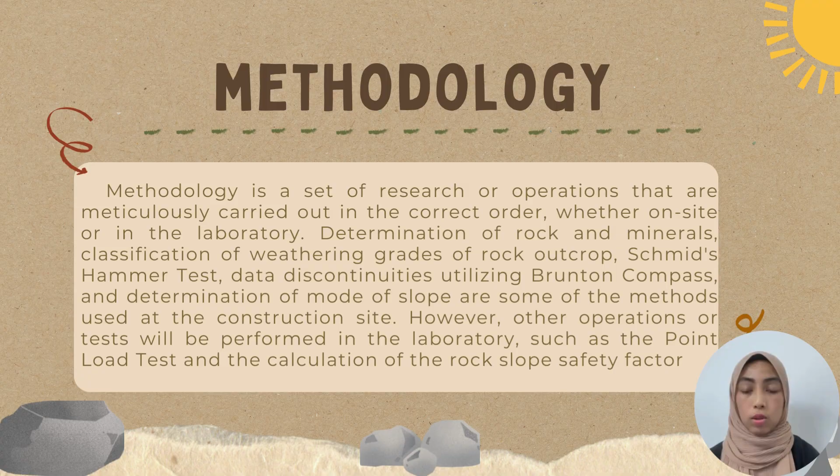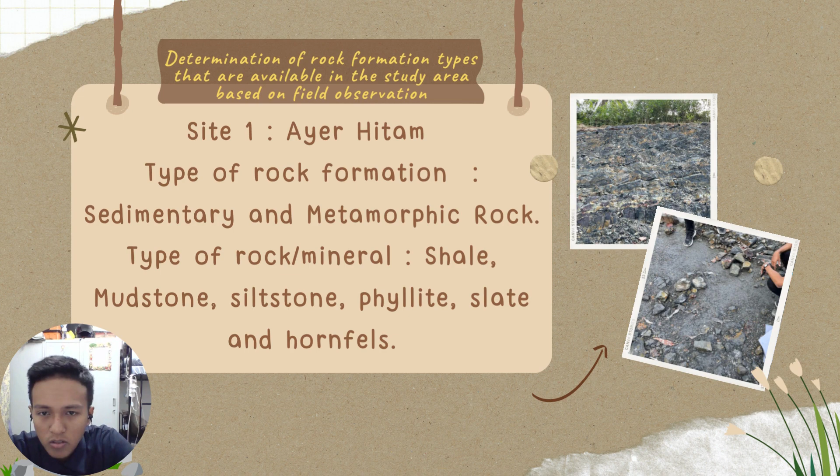First is to determine the rock formation type that are available in the study area based on field observation. At Ayer Hitam, the type of formation is sedimentary and metamorphic rock, and the type of rock or mineral is shale, mudstone, siltstone, phyllite, slate, and hornfels.

Identification and classification of weathering grade of the outcrop. At Ayer Hitam, there are 4 grades: 3, 4, 5, and 6, which is moderately weathered, highly weathered, completely weathered, and residual soil.

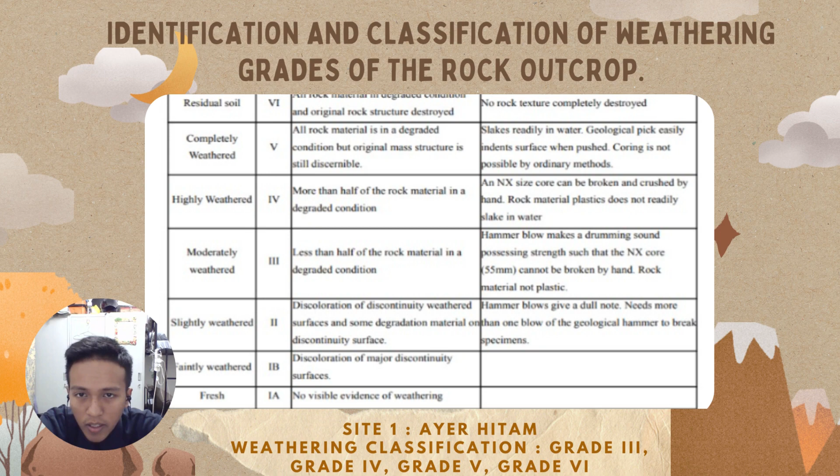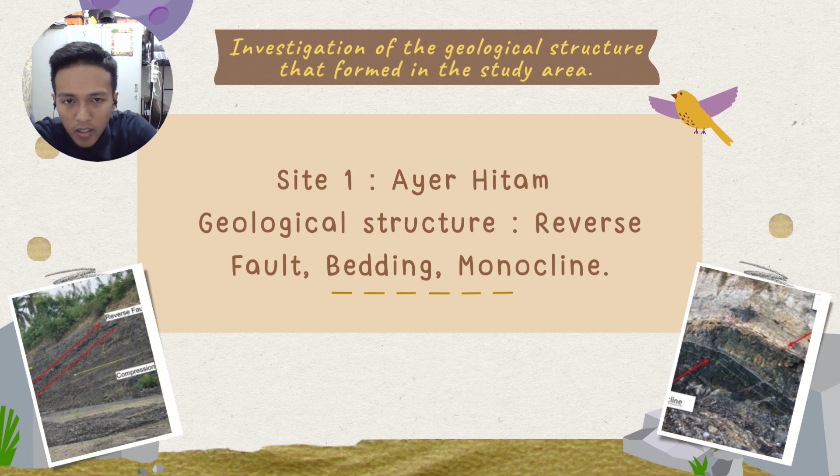Investigation of the geological structure that formed in the study area. There are 3 geological structures: reverse fault, bedding, and monocline. And there are 3 types of index testing: Schmidt hammer, point load, and slake durability.

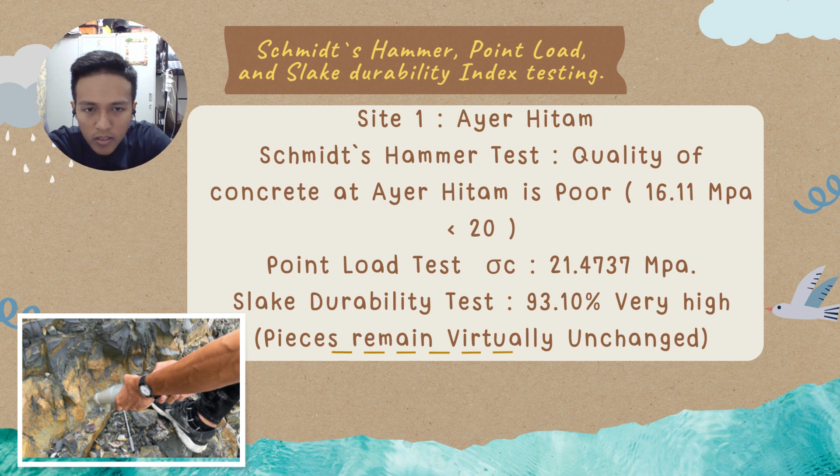Schmidt hammer test quality of concrete at Ayer Hitam is poor, which is 16.11 MPa, less than 20. For point load test, 21.4737 MPa, and slake durability test 93.10%, very high. Pieces remain virtually unchanged.

Determination of rock mass quality using 2 methods: rock mass rating (RMR) and geological strength index (GSI) for slope. For RMR, we got a rating of 42, which is grade 4, fair rock. And for geological strength index, 25% is blocky and disturbed.

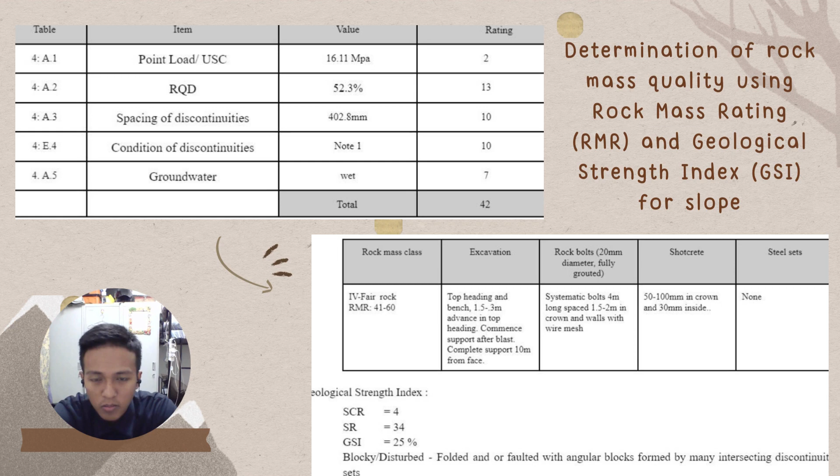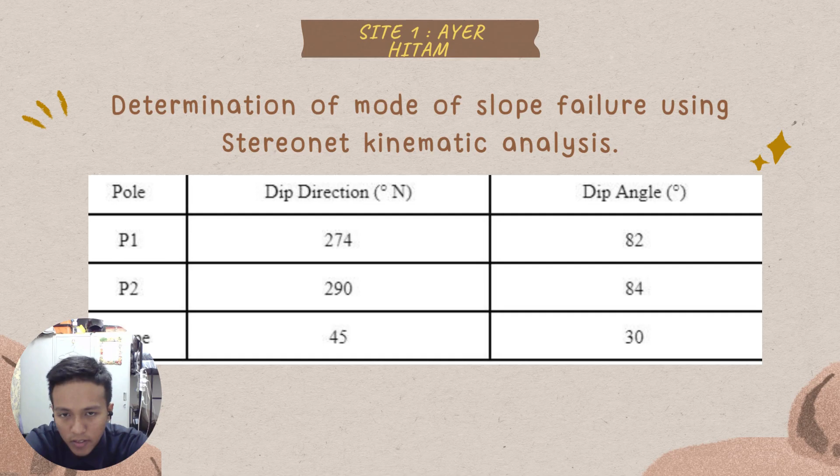Determination of mode of slope failure using stereonet kinematic analysis. For pole 1, dip direction is 274 degrees and dip angle is 82 degrees. For pole 2, 290 degrees dip direction and 84 degrees dip angle. And the slope at Ayer Hitam is 45 degrees dip direction and 30 degrees dip angle.

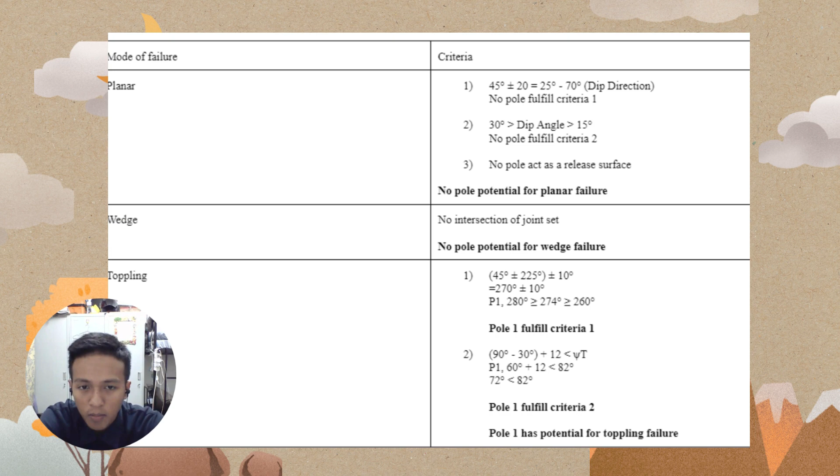Criteria for slope failure at site 1: for planar failure, no pole has potential. For wedge failure, no pole has potential. And for toppling failure, pole 1 has potential.

The factor of safety for the selected rock outcrop slope for the site study. For Ayer Hitam, pole 1 has potential for toppling failure. That's all from me. Thank you.

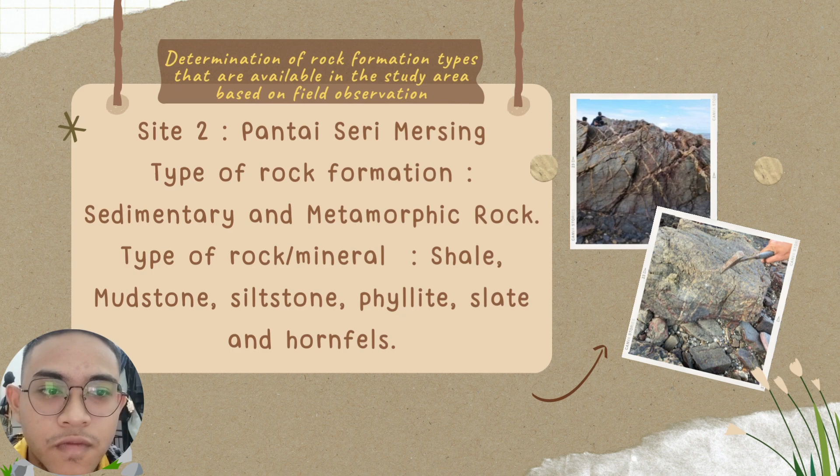Based on our field observation for the determination of rock formation types available in the study area at site 2, the type of rock formation we observed is sedimentary and metamorphic rock, and the type of rock or mineral is shale, mudstone, siltstone, phyllite, slate, and hornfels.

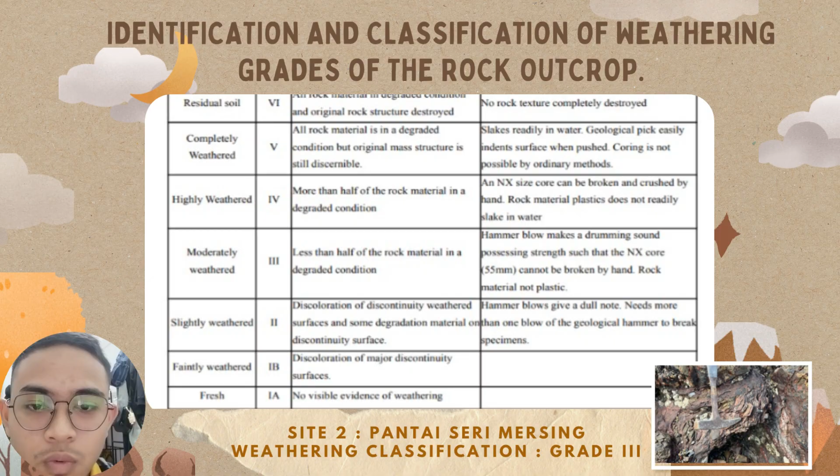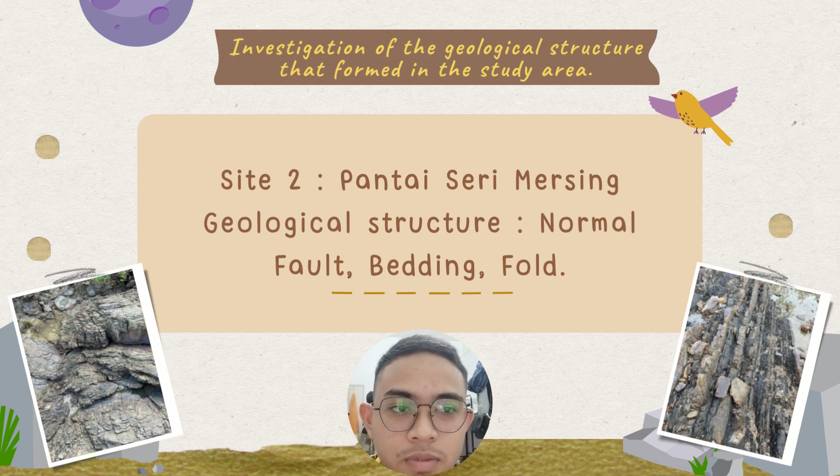For the next part, we study the geological structures that are formed in Pantai Seri Mersing. The geological structures we got are 3 types, which are normal fault, bedding and fold.

Okay, for the Schmidt hammer test that we got in Pantai Seri Mersing, the data obtained and the results for the Schmidt rebound hammer graph based on MPA, we calculated the average. So we got 40.22 MPA, which is more than 40.

And then for the point load test, from the point load data test, we got average point load test, which is 2.9713 MPA, and we calculated the uniaxial compressive strength UCS at rock, which is we got 59.4253 MPA.

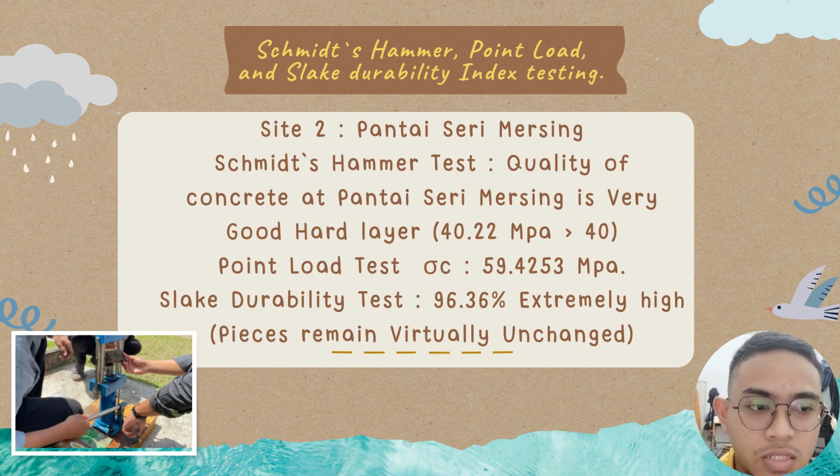Okay, for the last test for this site is we observe the slake durability index test from the type of sample of first cycle and second cycle. So the slake classification that we got is extremely high, and the visual description is that the pieces remain virtually unchanged. So that's all from me. Thank you.

Hi, my name is Ulwan Muzammil, and this is for Site 3 location at Pantai Air Papan.

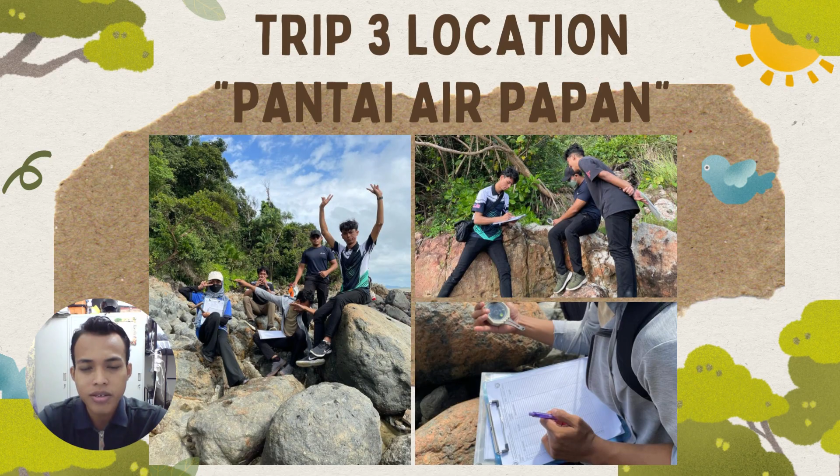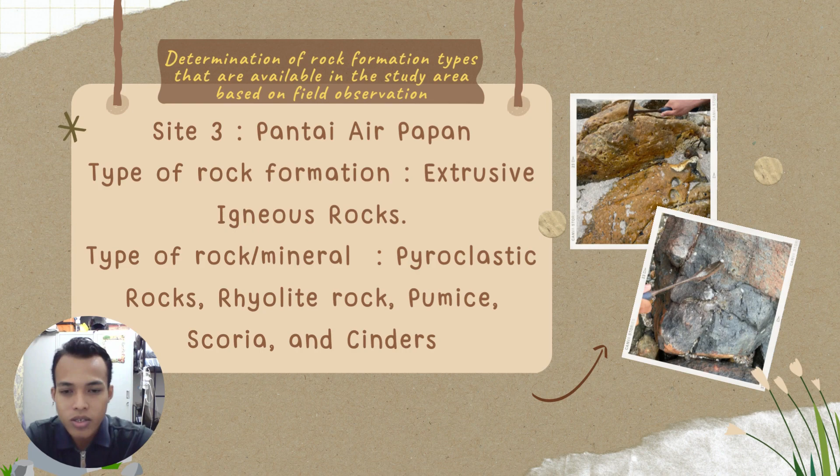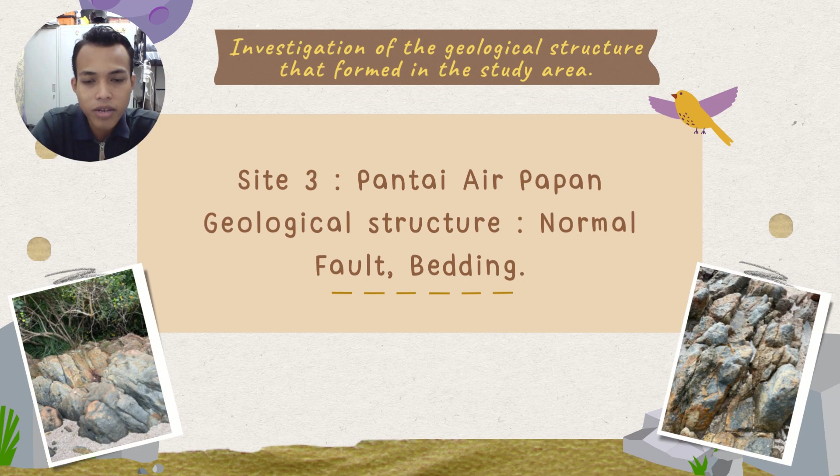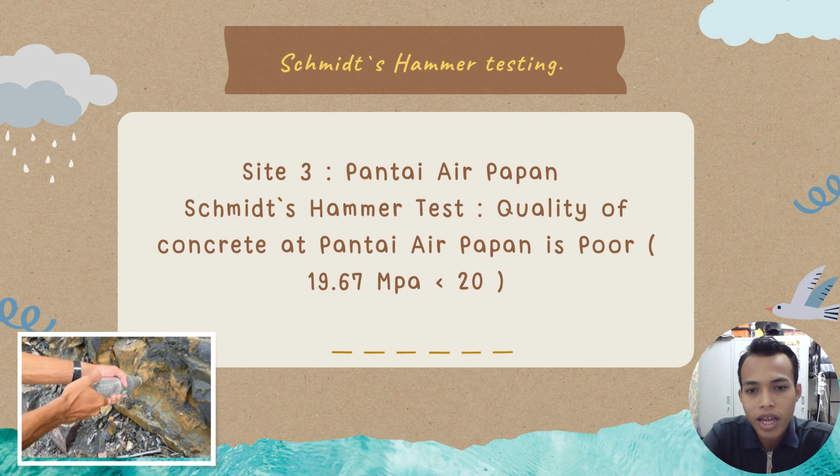And we have 2 types of geological structure at Pantai Air Papan, which is normal fault and bedding. So for the Schmidt hammer test, the quality of concrete at Pantai Air Papan is poor, which is below 20. And this is the dip direction and dip angle for every joint set at Site 3, Pantai Air Papan.

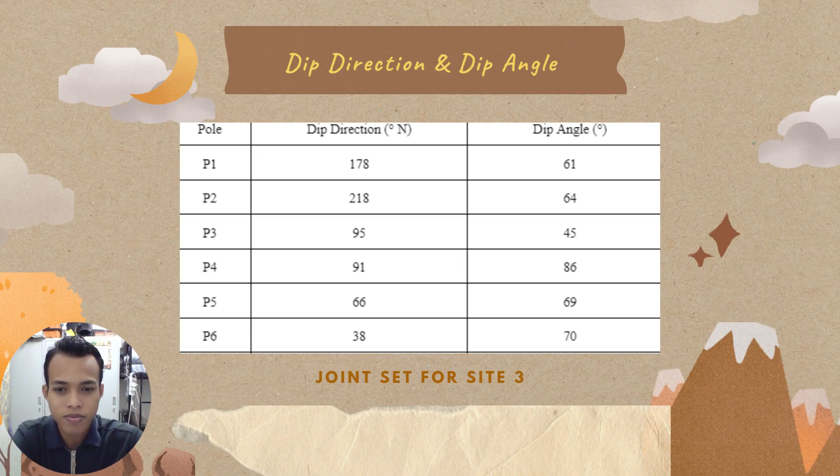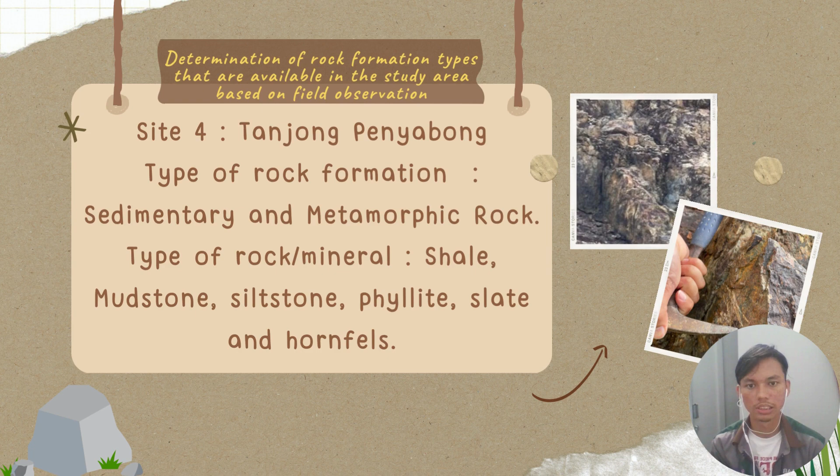So for the determination of rock formation types that are available in the study area, which is Site 4, Tanjung Penyabong, the type of rock formation is sedimentary and metamorphic rock, and the type of rock and minerals is shale, mudstone, siltstone, phyllite, slate, and hornfels.

So for the identification and classification of weathering in Site 4, Tanjung Penyabong, we have slightly weathered, grade 2, moderately weathered, grade 3, highly weathered, grade 4, and lastly completely weathered, grade 5.

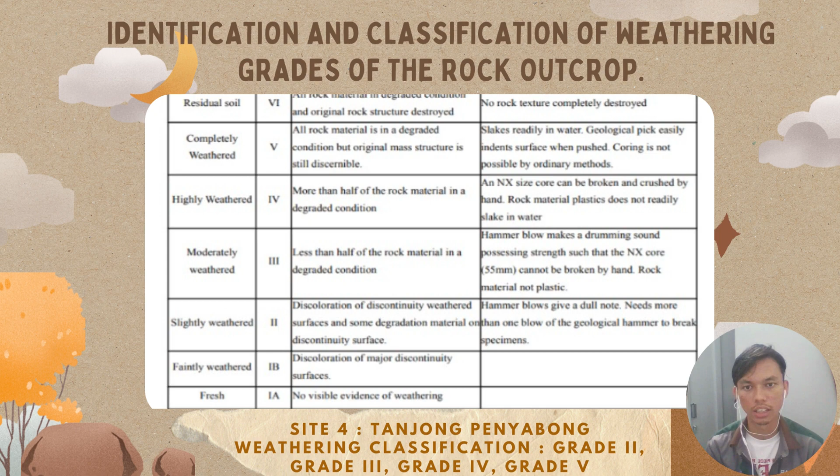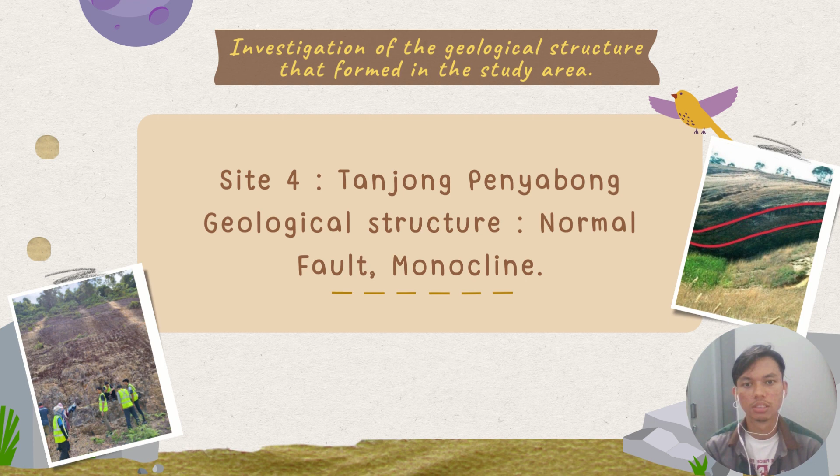So for the geological structure in Site 4, Tanjung Penyabong, we found there is only normal fault and monocline. There are only two types of geological structure that we found there.

So for laboratory testing in Tanjung Penyabong, we only did Schmidt rebound hammer. So for the result, we conclude that the quality of the concrete at Tanjung Penyabong is fair, between 20 to 30. The value that we got is 27.78.

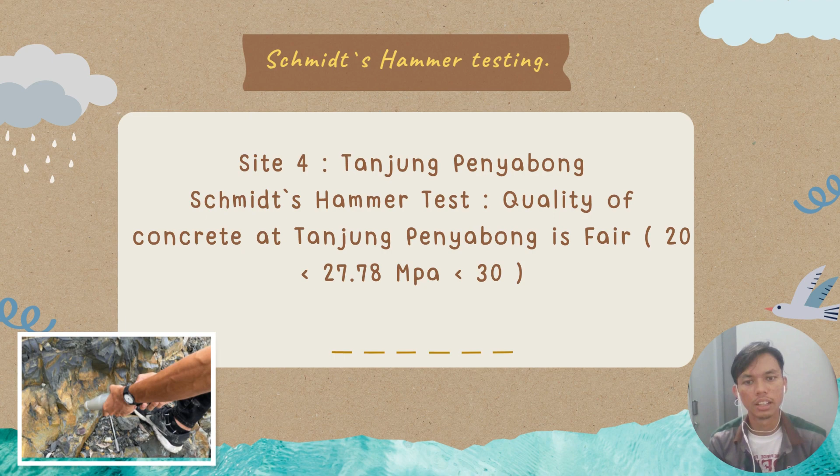So for the determination of rock mass quality using RMR and GSI, the RMR we got is 62, which is considered good rock, and the GSI we got is 44%, which we consider blocky and disturbed.

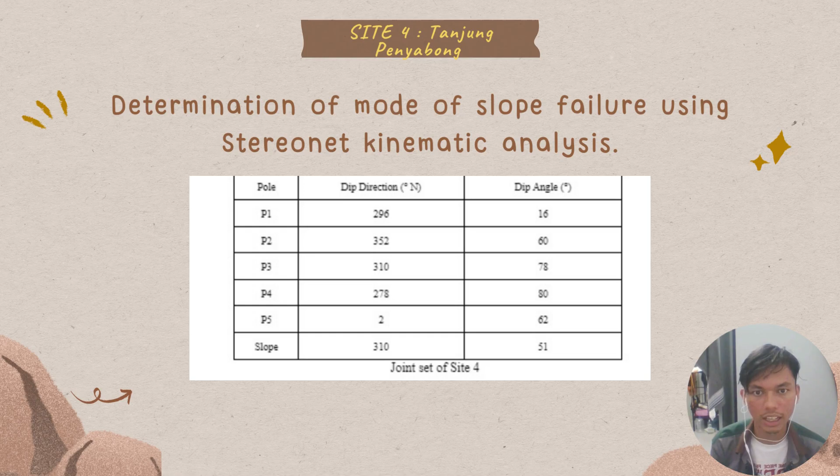Pole 3, 310 and 78. Pole 4, 278 and 80. And pole 5 is 2 and 62. And for the slope, the dip direction is 310 and the dip angle is 51.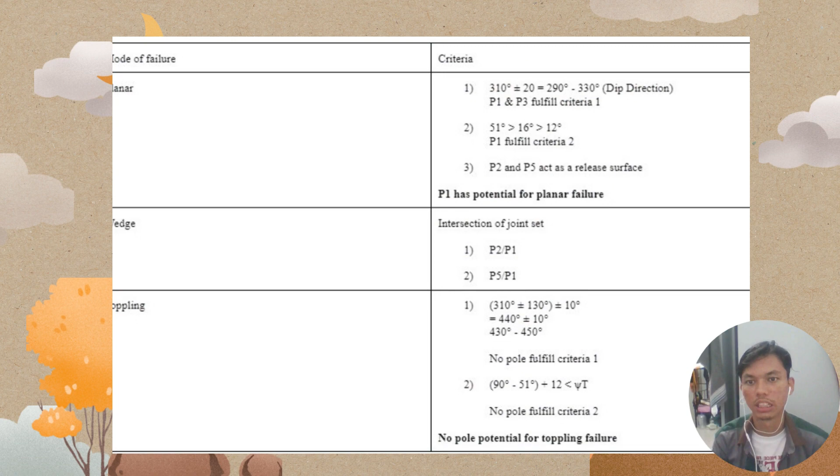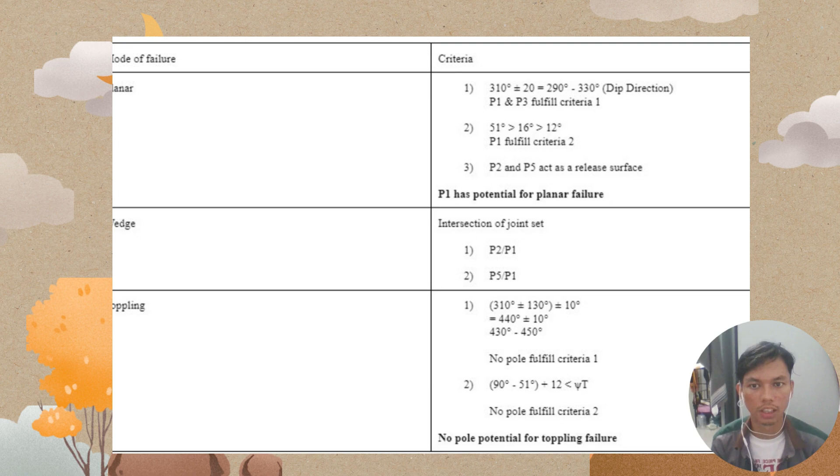So for the criteria of slope failure for Site 4, we got 3 modes of failure, which is planar, wedges, and toppling. For the planar, P1 has the potential for planar failure, and for the wedges we got only 2, which is P2 and P1, and P5 and P1. So there is no toppling that we got from Site 4.